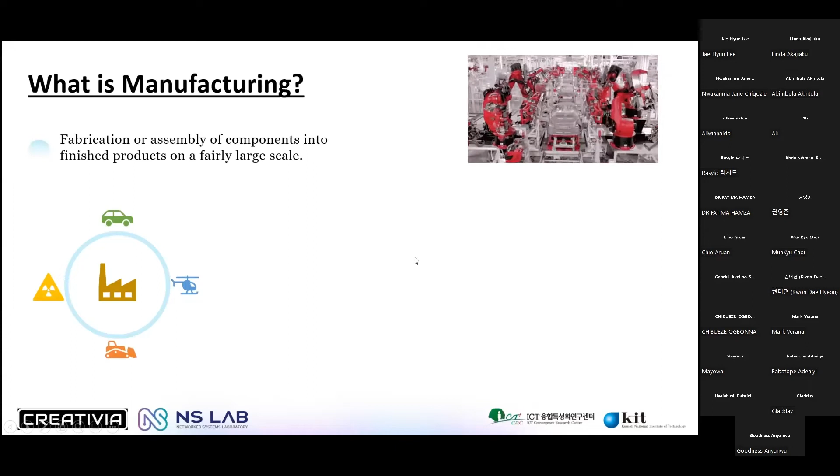So what is manufacturing? Manufacturing is simply fabrication or assembly of components into finished products on a fairly large scale. Now, manufacturing is in so many industries. We can find it in the automobile industry, the aviation industry, chemical industry, and heavy machinery industries, because all these are kind of subsets of manufacturing industries.

Manufacturing industry didn't just start today. It has gone through so many industrial revolutions. The first industrial revolution was the birth of mechanization. We had our steam power and all that in 1784. Then the second industrial revolution was when electrification was a thing. That was when we started having mass production and assembly lines.

Automation never came until the third industrial revolution. Then we started having automated factories and automated industries and things like that. Then we have our computers and electronics. That was in 1969.

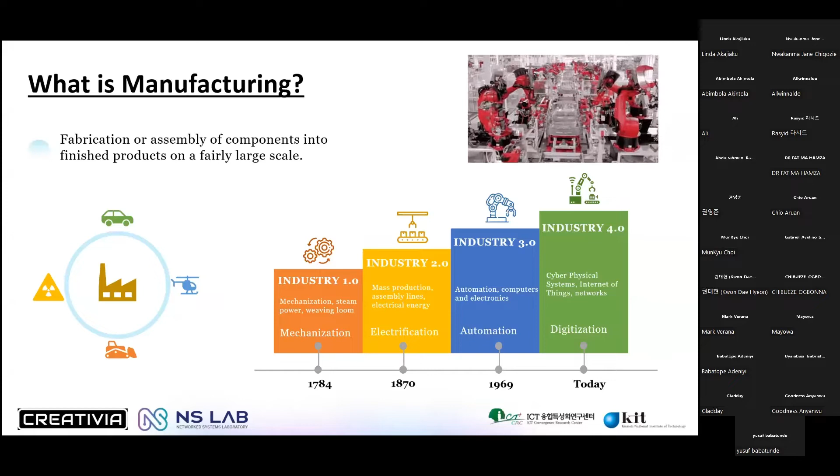Then right now we are currently in the industrial 4.0 era, which is the era of digitization, or where we're moving towards. This has been aided by things like cyber physical systems and the Internet of Things, the networks. So before we can go further, we have to know what the concept of smart manufacturing is.

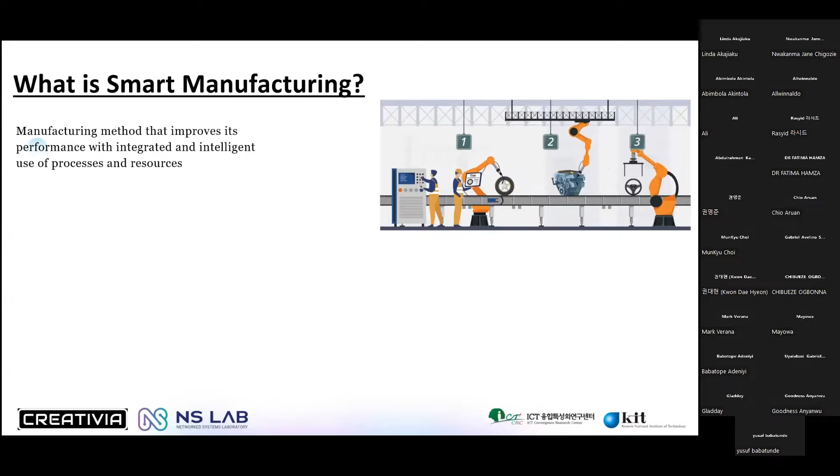Smart manufacturing is any manufacturing method that improves its performance with integrated and intelligent use of processes and resources.

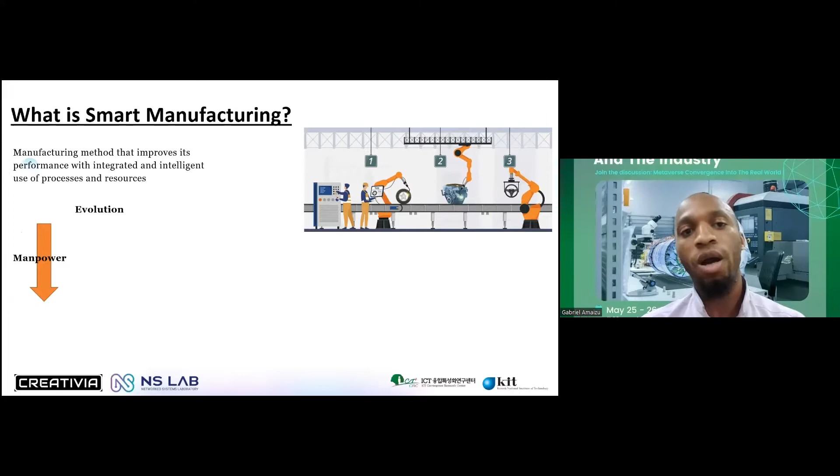Now, there has been so much evolution. We can look at the evolution from conventional to smart manufacturing, as in the initial stage there was a huge emphasis on manpower. But gradually, while the emphasis on manpower in manufacturing is going down, the emphasis on knowledge and experience in manufacturing comes up.

So what we can say is, in the initial industrial revolutions, we had humans working as machines, but now we are having machines learning to work as humans. There have been some driving factors to this: industrial IoT, big data, cloud computing, and AI. All these technologies have tended to drive us from human-focused manufacturing into machine-focused manufacturing, where machines learn to work as humans.

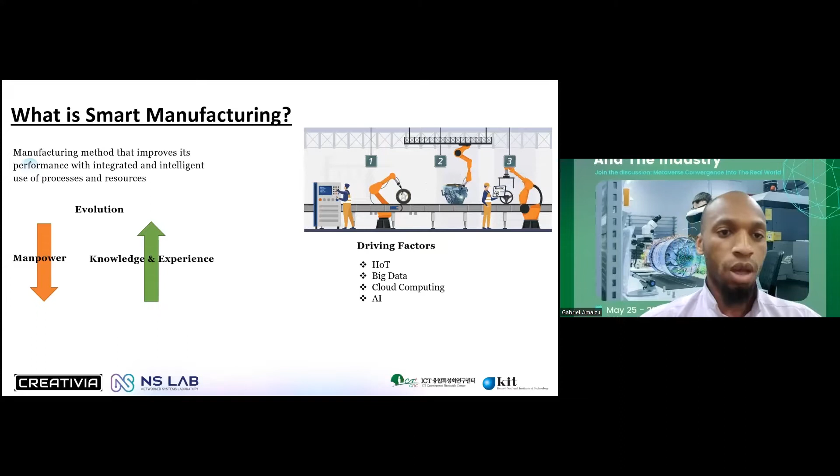So why do we need smart manufacturing? For us to answer this question, we have to see the difference between conventional and smart manufacturing. Conventional can be called traditional manufacturing.

So in smart manufacturing, there's diverse resources. This simply means that in smart manufacturing, it is technically easy for you to switch between production lines. You can produce different products at the same time using different resources.

But in conventional manufacturing, it's all about mass production. Remember the industry 2.0 we talked about - it's all about mass production. We want to produce this computer chip, we produce only this computer chip in a large quantity. We cannot change our factory to produce computer chips and probably produce a mouse or a keyboard at the same time.

So smart manufacturing has deep convergence, meaning that each part is related to each other. There is communication - when there is a breakdown here, the other one takes up. But in conventional manufacturing, the layers are really separated, that is, I would say the right hand doesn't know what the left hand is doing.

In smart manufacturing, things are self-organized. Control is split among various resources. One basic example of this is, for example, you have a production line, and along the way something gets spoiled - smart manufacturing can be able to correct itself, but conventional manufacturing has to be shut down and the correction done manually.

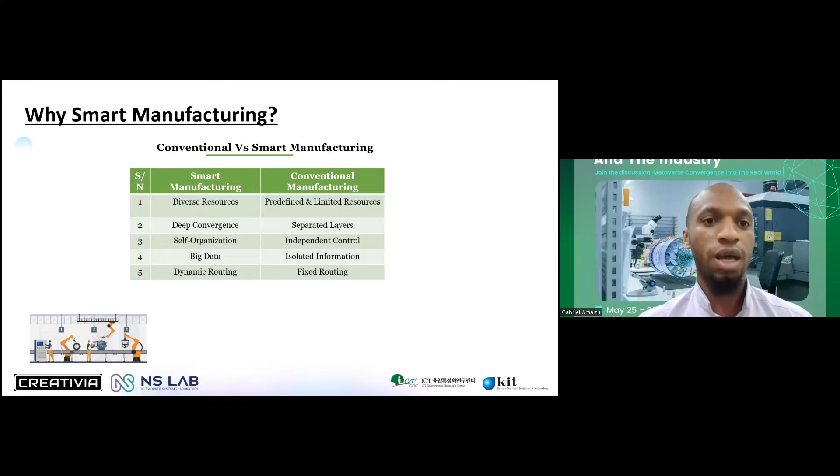Dynamic routing is there should be routes linked that can easily enable us to switch from one production line to the other. But conventional manufacturing, through the mass production route that is taken, the routing is fixed. For you to change any production line, you have to stop everything totally and redraw the line of production.

So there are some benefits of smart manufacturing. It reduces costs, it enhances productivity. Data is automated, things can be done on their own without the factory manager being there some of the times. Then there's worker safety, since we bring in more robots and more intelligence into the work, we can easily detect incidents in a factory. And of course, we can detect defects and improve quality.

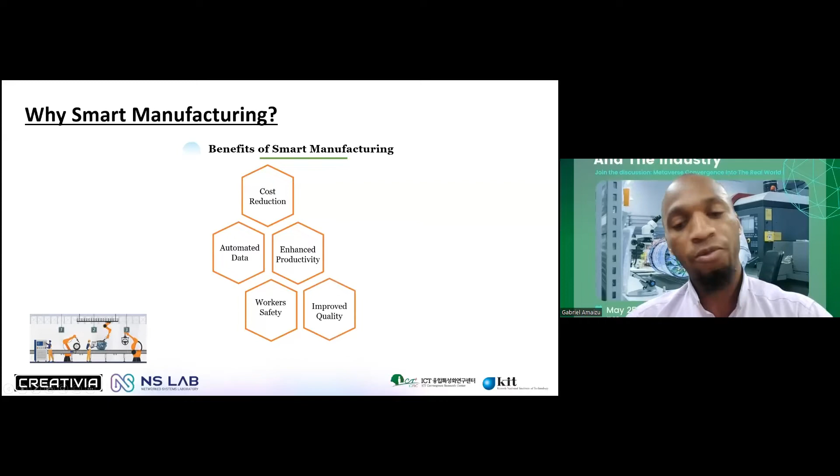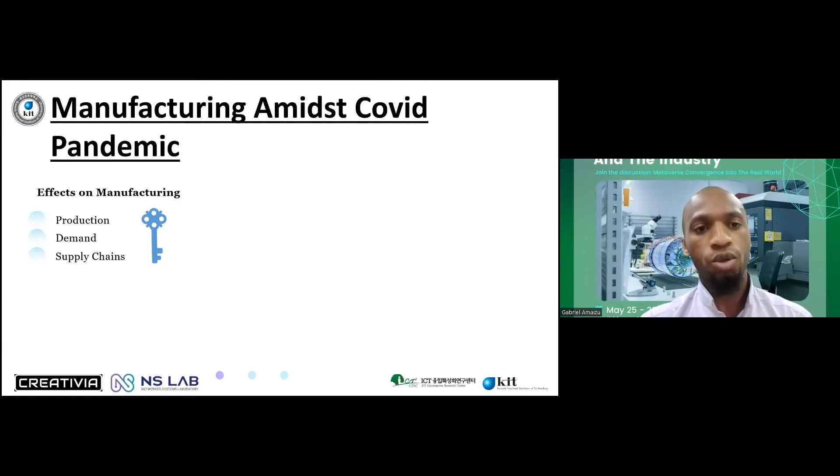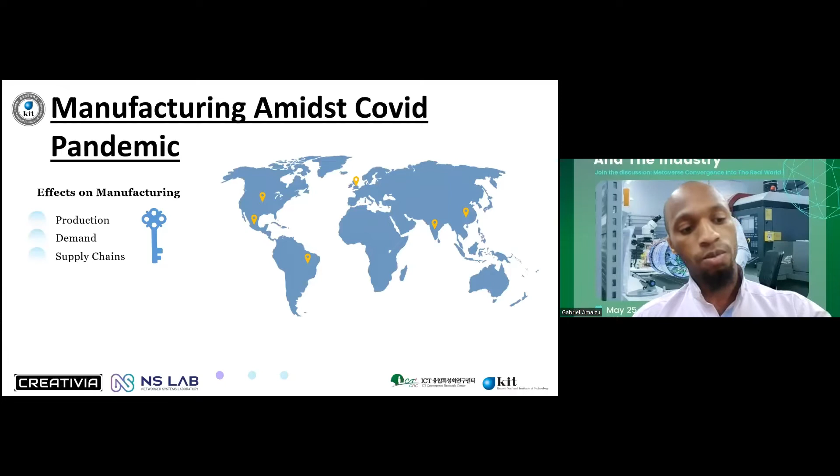Now we'll look at manufacturing during COVID. The pandemic affected three key things: production, demand, and supply chains. These three things are the key that underpins what a successful production or manufacturing line should be. There has to be adequate production, adequate demand, and the supply chain has to be robust. Earlier last year, we did a survey on this effect of the pandemic by looking at some factory staff in about 6 different countries, and they all came up with a simple answer each time: that a manufacturing system that is immune to pandemic has to be fully digitalized.

That's why I told you we're now moving from smart factory to digital factories. We are moving from the smart era to the digital era where everything is digitalized. Now, for us to have an adequate digital factory, there are 2 things that we need: a digital production line and a digital supply chain.

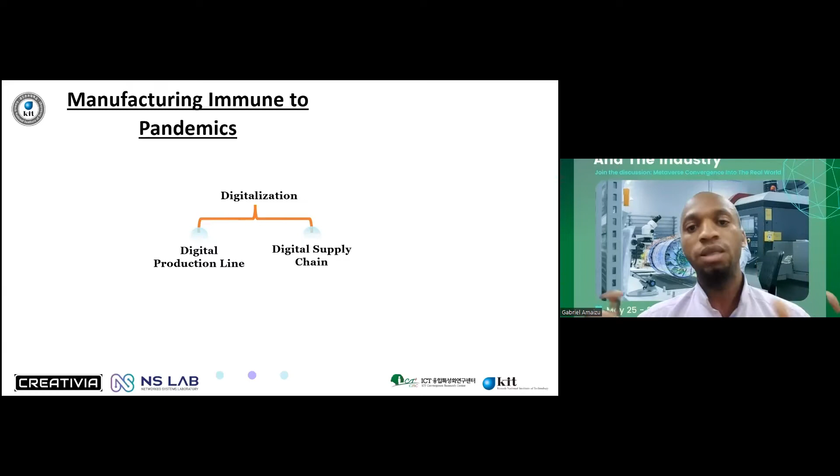A digital production line brings together 3 things: the business, the design, and the operation of the organization. Before now, these things were seen as different aspects - the business is different, the design is different, and operations is different, with probably different people heading them. But what the digital production line entails is bringing these 3 components together with the sole aim of improving the production process.

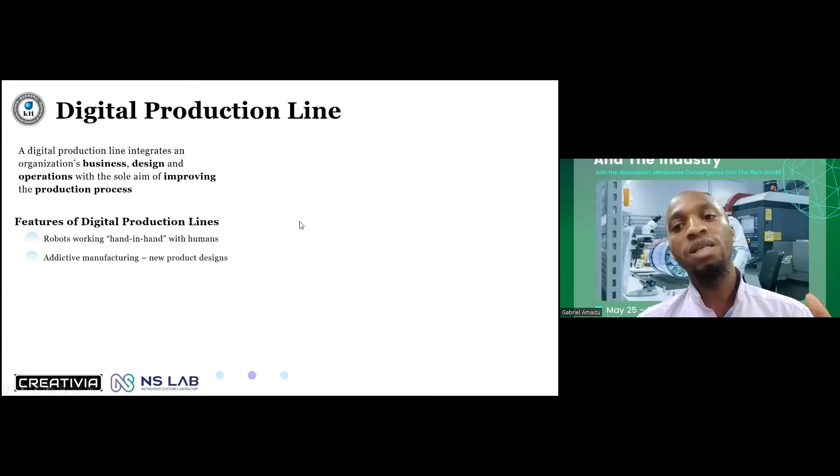Now, there are some features of this. We have robots working hand in hand with humans in a safe and conducive environment. There's an ease of bringing in new design. You must have heard of additive manufacturing, where we don't have to go through a ton of hurdles for us to produce things. This is because we're using a digital production line.

Then the factory managers - they're able to use most of these technologies because now we're making good user interfaces, simplifying it, making it easy for factory workers to work from one place to another, holding a gadget and monitoring so many things. That is the aim. Then connectivity - we're connecting the factory floor to the cloud, and the cloud does all the processing, gets back the data. It is transparent and agile, then predictive rather than preventive.

So there are some steps taken for us to go truly digital in terms of production line. First of all, we have to reinforce the physical deployment by bringing in sensors and actuators, such as robots in the factory. Then we have to set up a cluster in the cloud to analyze data, because when you have so many sensors on the factory floor, there's so much data, and the factory might not have enough power to process it. So you set up a cluster in the cloud for this data to be processed.

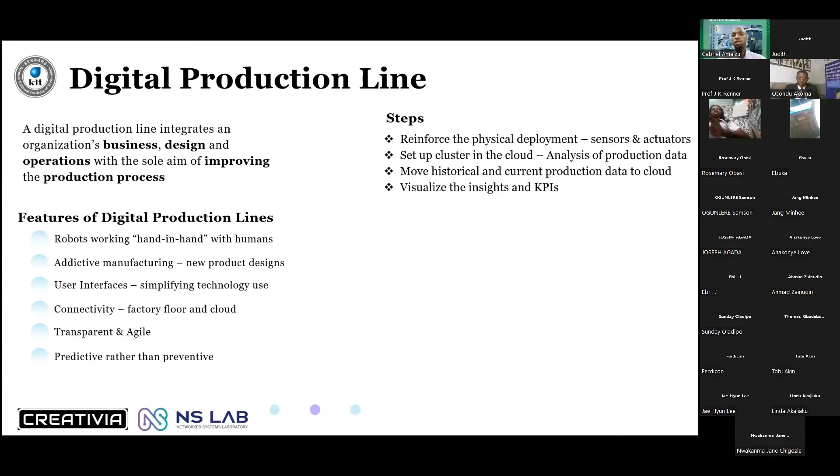Now we move the historical production data and the current production data to the cloud. This data is processed in the cloud, computed, and sent back to the factory manager, where he can visualize the insights and the key performance indicators. This slide might be long, but I want to take out 3 things from this slide: predictive rather than preventive, the user interface, and the visualization. We'll be coming back to that in a bit.

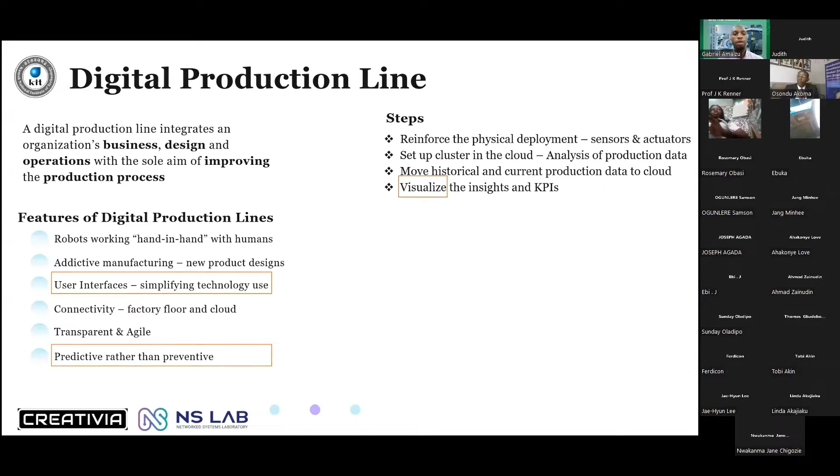Then supply chain - it's the advanced technologies that make stakeholders know where something is at a particular time, from the point of production to the delivery point. What this system does is it collects and analyzes data, and provides timely, visible information to each partner in the chain.

So, for example, I'll give a brief example of this. A clothing store using a digital supply chain, just with a glance at any device, can easily tell how many blue jeans they have in stock, how many jeans are being produced by each manufacturer, and how many are coming on the way. You can track all this, and this enables each stakeholder to know if there will be a delay in terms of delivery, or if there will be a delay from their part in terms of supply.

So the other person can be able to factor in those details. This is what a normal production line will look like. We have you start your production, the OEE, the operator, the overall equipment effectiveness. You check that, then you start production.

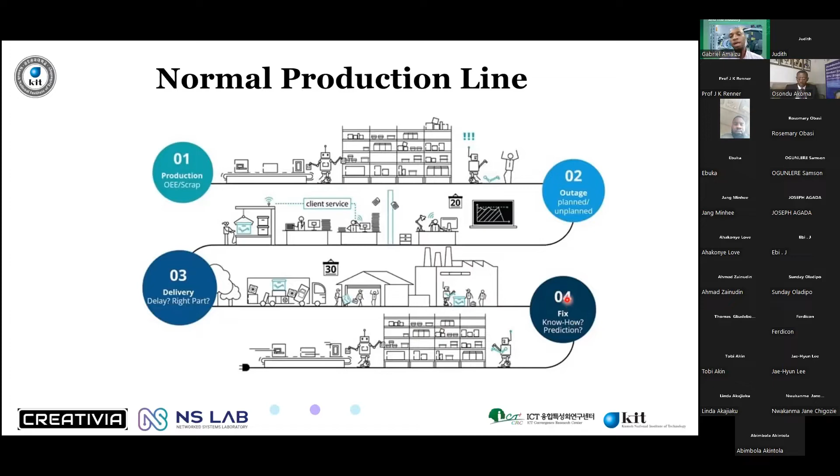But in an ideal world, in a digital production line, we don't have all this hassle. From the point of production till the point where you fix or receive it, everything goes just as it's supposed to go. We'll come back to this slide later. I want to explain some of what is going on here in the following slide.

So the journey so far, like you heard the previous speaker, he talked about XR and the rest. XR is an all-embracing term. It covers virtual reality, augmented reality, and mixed reality. So VR, AR, MR, and everything that lies in between them. With XR and Metaverse at large, we're trying to bridge the divide between the physical and the digital world, trying to make them seamless, work hand in hand.

So let's assume this is the real world. The real world is the physical environment around us. This place I am, wherever you are, is the real world. We have this technology I just mentioned, and digital twin, which is the last one. We'll break them down one after the other.

So VR, everything about VR is completely digital. There's nothing physical in VR, it's just a digital environment, a digital world. Now, in terms of manufacturing, there are a few things VR can give to us. These four cases you are seeing here are going to be constant all through the slides. I'll tell you what this can do and that cannot do.

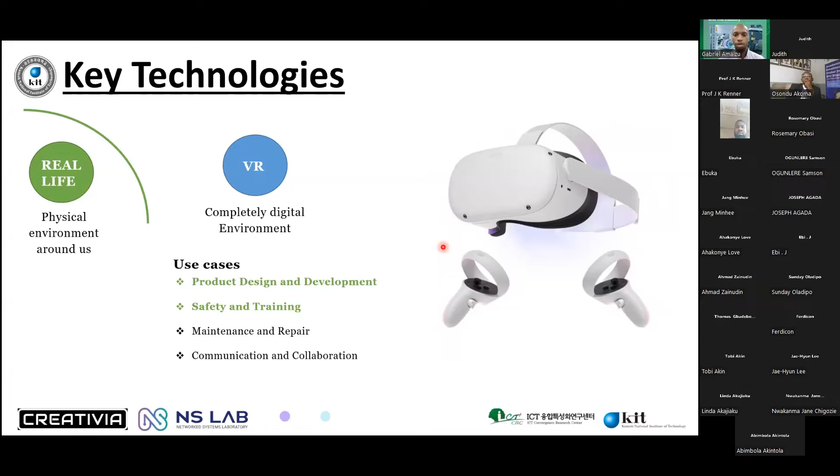And when they conduct factory training, safety trainings, and the rest, you can put it in the digital world, and people just go there, put on their VR glass, and watch the trainings and whatnot. But at the end of the day, with VR, you are taken completely outside of the physical world, which brings us back to the accident that my colleague, the previous speaker, talked about. It takes you out of this world, and sometimes it could be addictive.

Then came AR. AR, unlike VR, it's a real environment, but it's superimposed with the digital environment, with digital objects, like you've seen in those science fiction movies when things just display in the air, like just like that. That's what AR does. A real environment, I'm here, but I can cast something on the air and see it. That's what AR basically is.

And in terms of manufacturing, of course, whatever VR can do, the AR glasses can do. Product design and development, like a digital prototype, you can use it to watch training videos, and for the factory, because the factory is a complicated place, there are some processes that you want these factory workers to go through that you cannot really allow them to go through in the physical world.

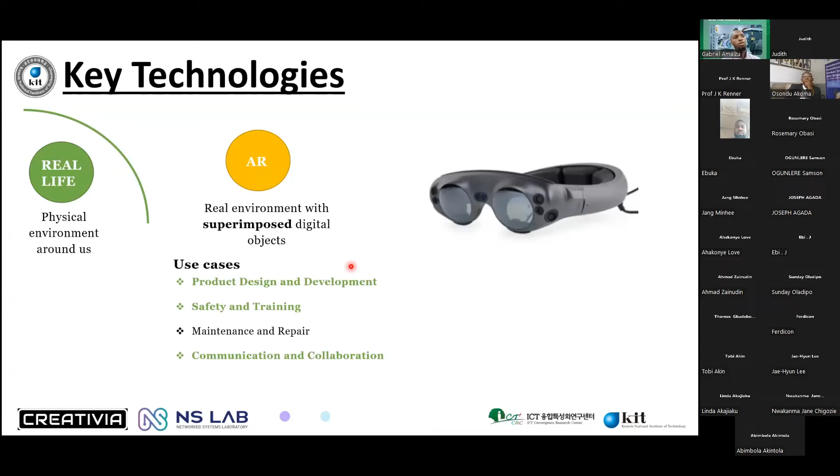Sometimes it exposes them to danger. But when you immerse them in this digital world, especially something like AR, they can be able to go through those processes easily without you spending money on probably extra resources to train them. Like when I mean resources, I mean the raw materials or something, or experiencing an accident in the factory.

Then, of course, with AR, there's communication and collaboration. In terms of communication and collaboration, we're talking about when you use this AR to get back data that is sent in from the cloud using digital twin. We'll get to that in a bit also. Then we had AR, VR. Now is the mixed reality.

The mixed reality is, like the previous speaker said, VR and AR put together. So mixed reality is a real environment, just like augmented reality, superimposed with digital objects. But in this case, you can interact with those objects. When I say interact, you can actually touch them. You can turn them around. Just imagine you have a 3D projection of something in the air, and you can interact with it. That is what MR does. It's a real environment, digital objects in the air that you can interact with.

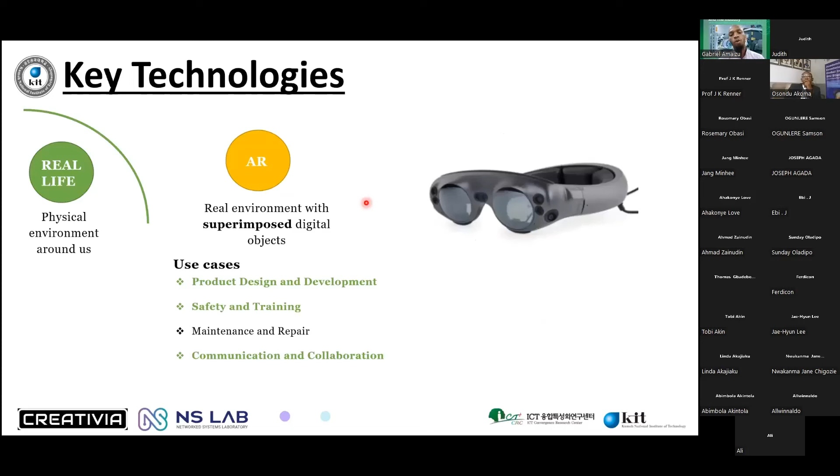So in terms of AR and MR, the devices are not really that different in terms of physical look, but they differ in terms of functionality. If you notice, AR does almost everything in this use case except maintenance and repair. Now, how does MR help with maintenance and repair?

With MR, it's easy for factory workers to carry out this repair either remotely or on site, but hands-free. It's like putting on glasses and watching a tutorial. While the tutorial is being displayed, you're working. You're not holding anything physical; of course, holding a phone in a factory environment is not really ideal. So with MR, you get the advantage of being hands-free and interacting with objects that have been superimposed on your environment.

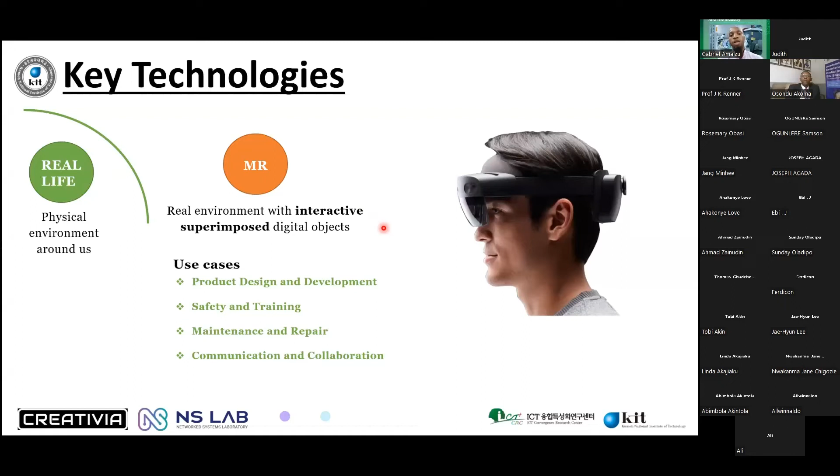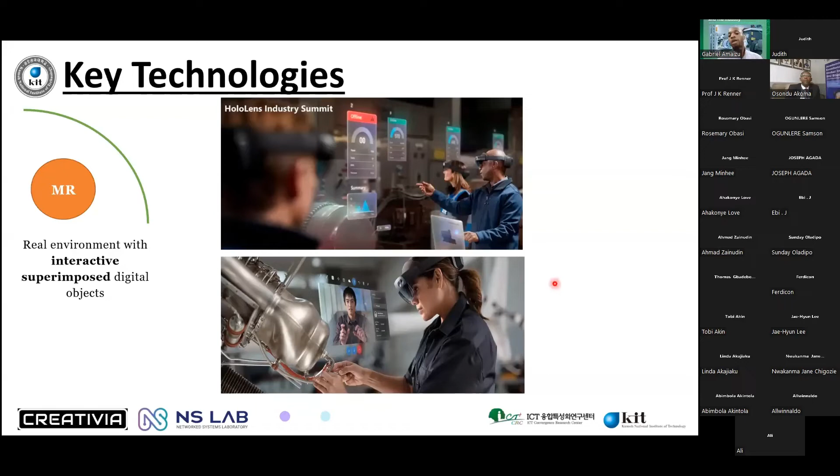So still on digital technologies, we're talking about digital twin. Digital twin is a virtual copy of physical assets, products, or processes. A digital twin can be anything. It can be a virtual copy of this building I am in, of a factory, of just a supply line, of a product. It can be anything.

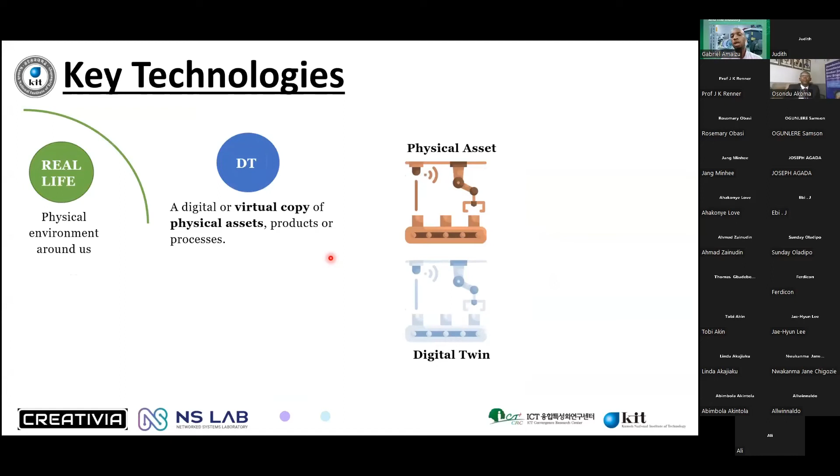But why digital twin is good, and is taking us to the next revolution, is it enables us to do so much more. With digital twin and mixed reality, factories are able to create a replica of the entire process in a digital twin, connect sensors to their factory, and these sensors send data to the digital twin. So the factory manager is getting a real-time analysis of the factory at all times.

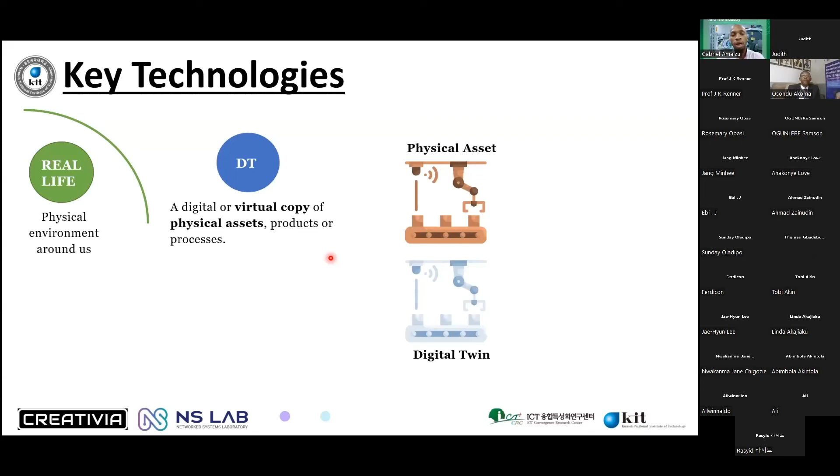Because when you're looking at the digital twin, you're seeing exactly what is going on in the factory. For example, you have sensors monitoring temperature, air humidity or pressure, or the working of a machine. At a glance, you can easily pinpoint what is wrong, where it is, what exactly the problem is, and it can easily be fixed without too much downtime.

So there are things about this. The digital twin collects data. It analyzes. Like I told you, there's the digital twin and there's the real world, but they are both connected because there are so many sensors on the real-world object, and that sensor data is sent to the cloud, which is connected to the digital twin. So you collect data, and it is analyzed in the cloud.

After that, you can perform simulations and predictions. Simulations can be in any form. It could be: this production line we've created, is it going to withstand this or that? So you try many scenarios in the digital world. You're not spending money building the entire production line before trying it out. You create it in the digital world, then you run simulations to come up with the best solutions.

Now, when you've come up with the best solution, you can also make predictions about what we call the remaining useful life. You can make predictions about the state of a machinery. You can make predictions about the rate of production, and you can also visualize the insights.

Yeah, exactly. So the factory manager can get a virtual view of everything that is going on in the factory using this digital twin. Then from getting the visual insight of everything, getting the key performance indicators, he can now make data-driven decisions, not just trial and error decisions like the smart factories or the conventional factories used to do. Data-driven decisions, then optimize what?

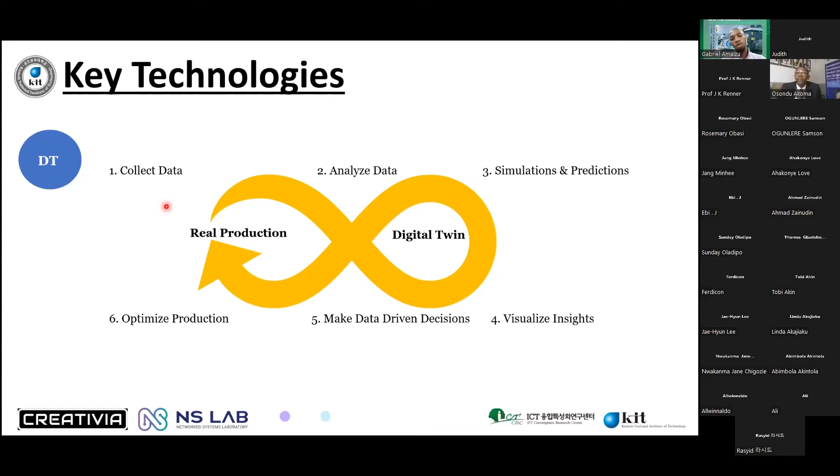Production. So I'll come back to this digital production line I told you about. You started production somewhere along the line because you're using the digital twin, and there's that section where we talk about the predictions and simulation. The system has been able to predict that this particular robot, or this particular object, or this particular product, or this particular machine, at some point is going to have a problem.

So what happens here is, because the factory manager already knows, there is a way he can incorporate either automated repair or an automated request for an additional part. So by the time this happens somewhere here, you've already gotten the delivery, you've already fixed the product, and you have less downtime.

So for this case study, I'll be walking you through a video of, like I told you, BMW and NVIDIA. Just give me a minute if I can get this to play.

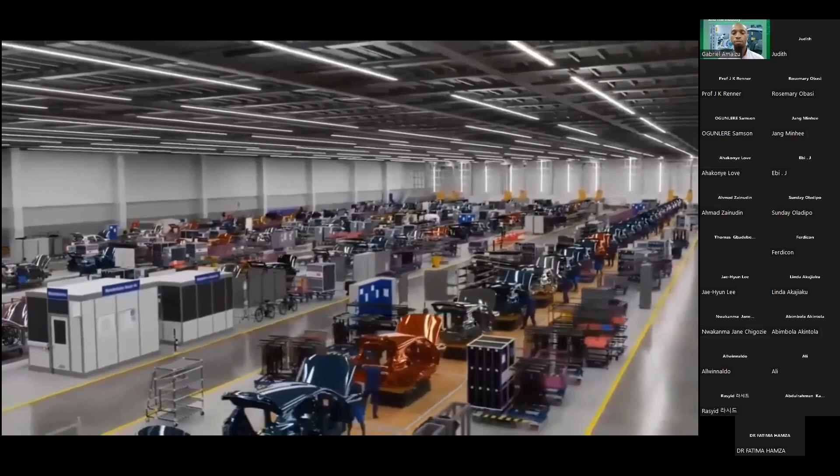Okay, I've seen it. So this is what BMW calls the factory of the future. It's a factory built by BMW and NVIDIA using the NVIDIA Omniverse. They've extended this to 3 of their factories as of early this year. What they did here was they created a digital copy of their factory. They ran millions of simulations.

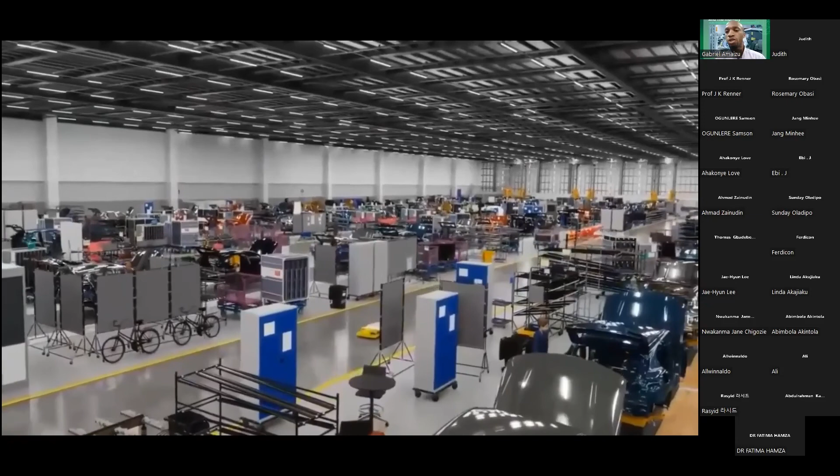Now, when you're running simulations in the digital world, you have the power of AI, which will probably be discussed by our speaker tomorrow. You have the power of AI, so you can run millions and millions of simulations. You don't have to be running them manually yourself. So what they did here was they ran so many simulations.

As you can see, these 2 guys in your picture are planning a factory, and they are from 2 different places. They are trying to make sure that the factory is okay for both humans and robots, making sure that objects are not placed too high or too low. But they are doing all these things from two different locations and in the virtual world, and it's like they're working hand in hand with each other.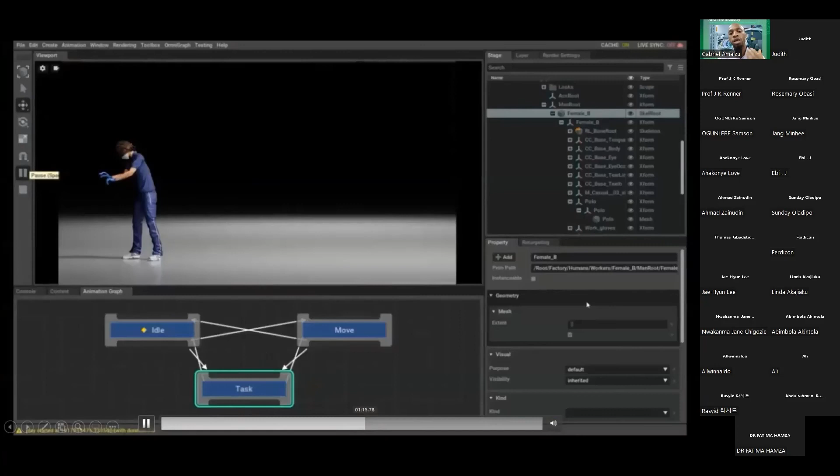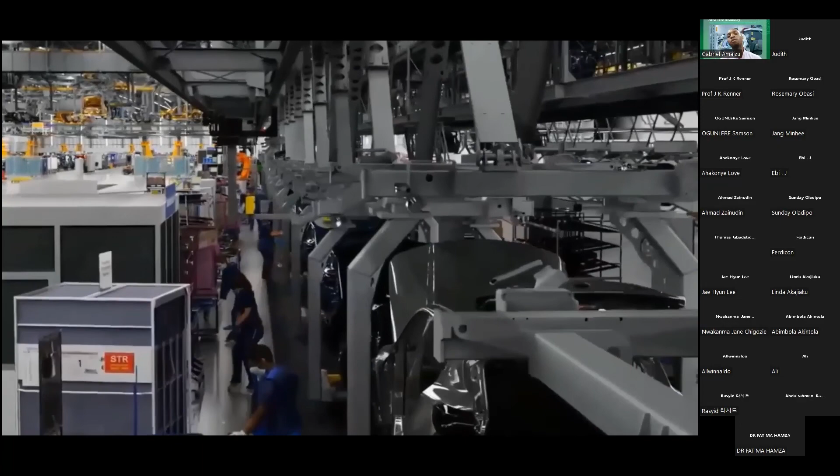Now, after that, I will show you where they're using AI and what they call the AI human. You can simulate human activities. Like I told you, you can simulate human activities to know the way objects in the factories are positioned. If they are positioned too high or too low, does it cause back pain over a period of time, and things like that?

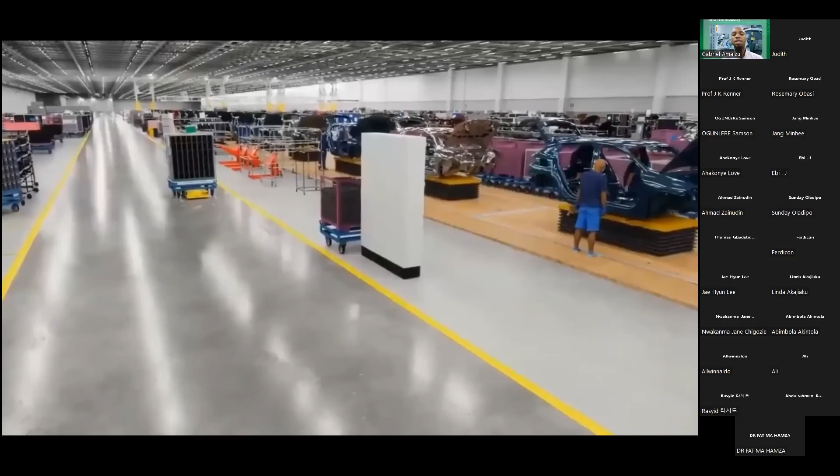So at the end of the day, when all these simulations and assumptions are done in the digital world, they can now implement it in the physical world, and you find that people work less and machines work more, because people are now working more intelligently, and machines are learning to work with them.

So in conclusion, there has been a lot of serious ongoing research on how this metaverse can be applied to manufacturing. But like we've already seen, the industry has been using everything from VR down to digital twin, which just became a thing a couple of years back.

And the overall idea of this project is, with our partner universities, we should come up with a way whereby factory workers or factory managers can access their factories virtually, creating an environment where repairs are automated, deliveries are automated, maintenance is automated, and it will be easy for them to work from the comfort of their home and still function as if they are at the plant itself.

And these things can only be possible with more study into the metaverse, which includes digital twin and MR especially. So while all these are still a bit away, not yet actualized, they are not that far out of reach, because what digital twin and MR have been doing has defied most logic, and we think they can play a critical role in the metaverse, which is why so many of these companies, as you'll hear tomorrow, most of the major car companies, are going into it.